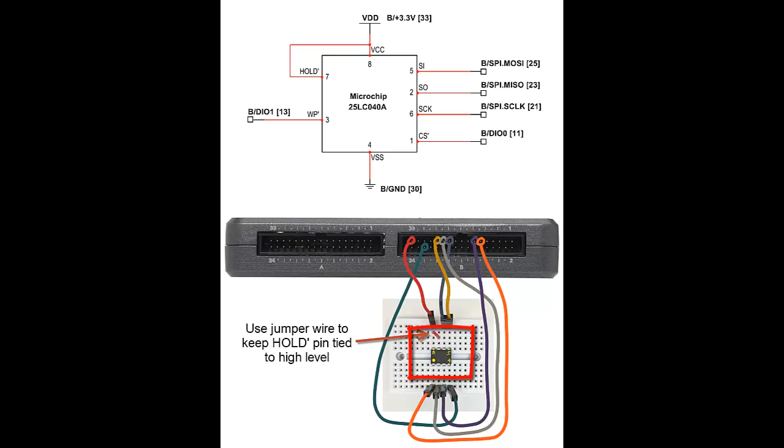Now let's take a look at the EEPROM demo LabVIEW project. Here I have the Microchip serial EEPROM connected up to MXP connector B. The VI is running right now.

You have a number of actions that you can perform. You can read the entire array, write to the array, read the status register, or write to the status register. Use this button to control the write protect pin.

Here you can read data from the array and display it in two different formats. Here you can specify values to write to the array and a starting address. Here you can specify a byte to write to the status register and then read it back.

Let's begin by reading the entire array. Now as shipped, that is when you have a brand new device, all the values will read as 255 or hexadecimal FF. Use the index control to look at different values within that array indicator. 511 is the last address. Set this back to 0.

Now at address 0, the value read back was 255. I'm going to attempt to write a 0 value to this location. So I want to write a 0 value at starting address 0. I'll select write array and then read back the entire array. Looks like no change here.

Well, it would help to enable the device for writing, so I'll click that one again, try writing and then reading back. All right, here's the 0 that was successfully written and then read back, and that's again visible on the plot.

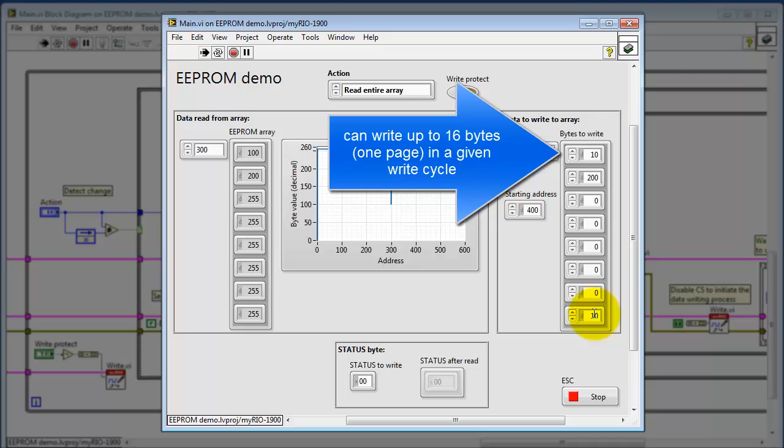Let's try writing a few more bytes all at once. Give this a different value here. I'm going to go ahead and select 30 down there, and that automatically fills in all the in-between values with zeros. I'll just leave it that way for now. Now you can write up to 16 bytes, which is 1 page in a given write cycle. So I do a read back after the write operation. Again, the vicinity of starting address 400.

Looks pretty good. Now at any time you can reinitialize the values to defaults, and that gets the front panel back to its original layout. Let's look at working with the status register. You can read back the status register after writing to it. So let me begin by reading the status register to see what's there.

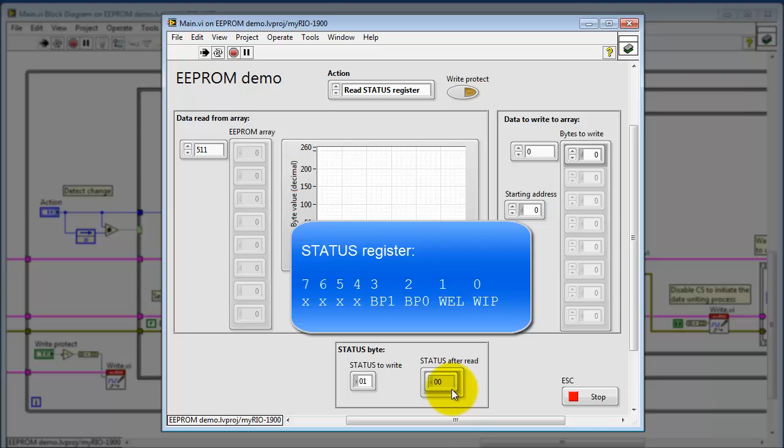Looks like 00. Let me attempt to write a different value, and I will attempt to set the read-only write in progress flag. Read back, and that didn't work. Well, I guess I had the write protect turned on. Let's try again. So I'll write the status register, then read it back. But this is a read-only bit, so you can't set it.

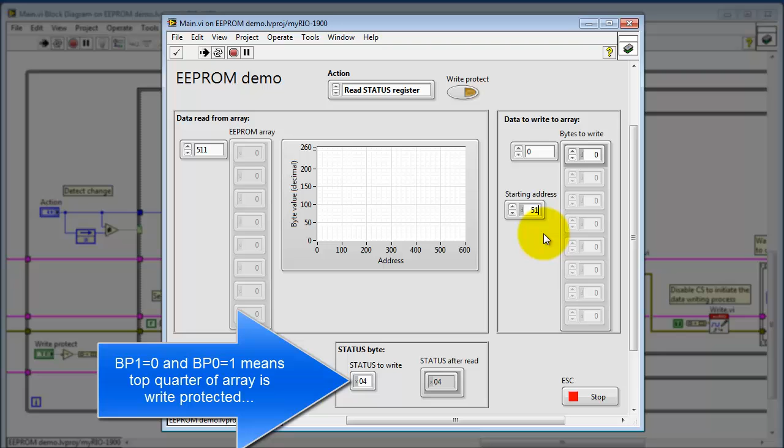Well, let me try selecting BP0, which is the block protect 0 flag, and this is a read-write bit. So I'll write it out, read it back, and sure enough, I was able to set that particular bit. Now I'm going to try writing to the very last address, address 511. The particular setting for the block protect bit means that the upper quarter of the array is presently write protected.

Let me read back the entire array just to confirm what's already there, which is 255. Let me attempt to write a 0 value at this location. Read back, and no, that didn't work. So that's evidence that the write protection is working.

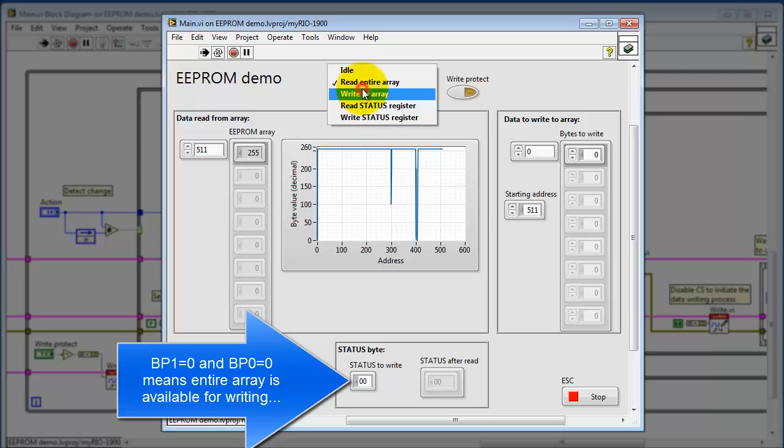Let me set the status register back to its original default value of 0. So write that and read it back. Let me try writing to the array and then reading back from the array. And here we have success. So at this point, I was able to write a 0 to that very last value.

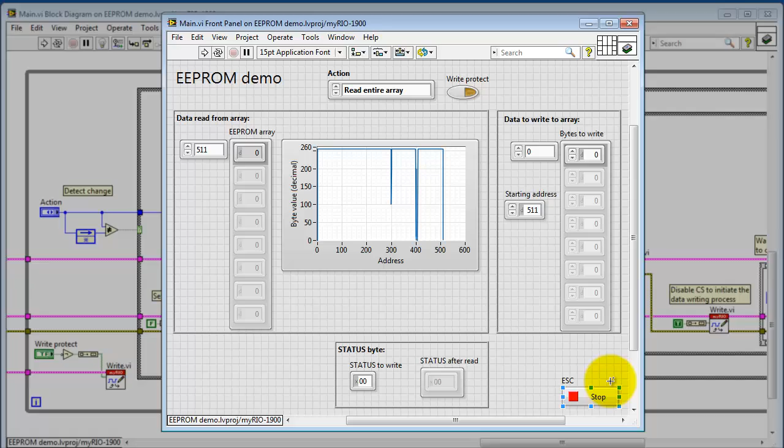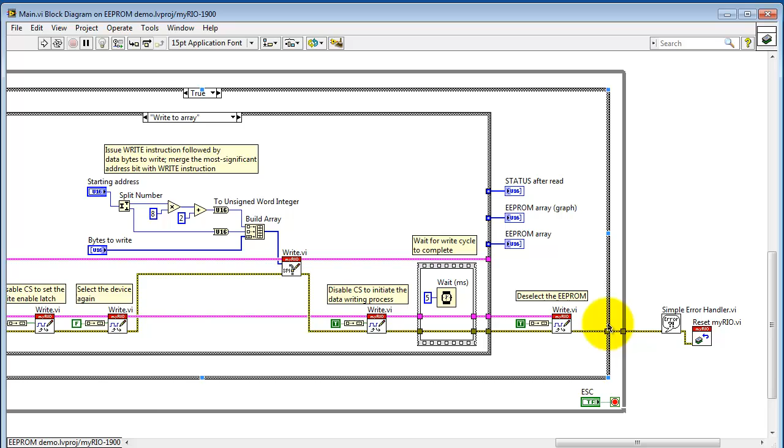Well, now let's take a look at the details of the block diagram. I have three sections: the configuration section, the main loop section in which I control the write protect line as well as process changes on the action control. When a change is detected, you have a number of different options depending on the action that was selected. That's the case structure. Here you see the front panel indicators. And finally, when you break out of the main loop, you can do a myRIO reset.

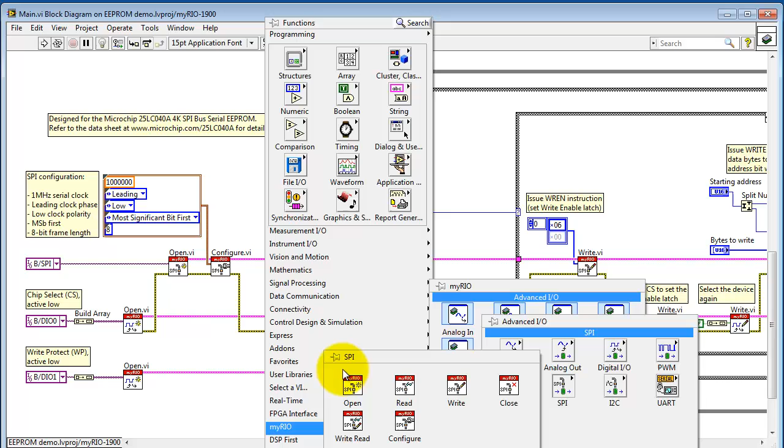Now, along this track, these are the SPI related VIs. These are available under myRIO Advanced IO and then SPI. You begin by opening the appropriate channel either on MXP A or B, and then configuring the channel according to all of these values here in the cluster constant.

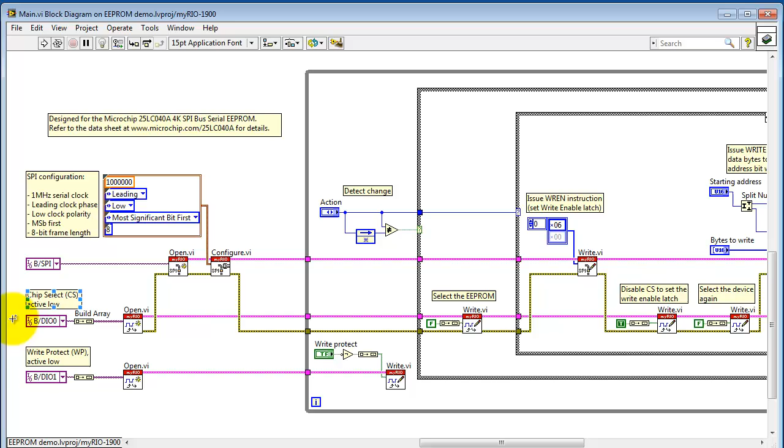I'm also using some low-level VIs to handle the digital outputs for both chip select and the write protect signal. These are also available under the myRIO Advanced IO subpalette under Digital IO.

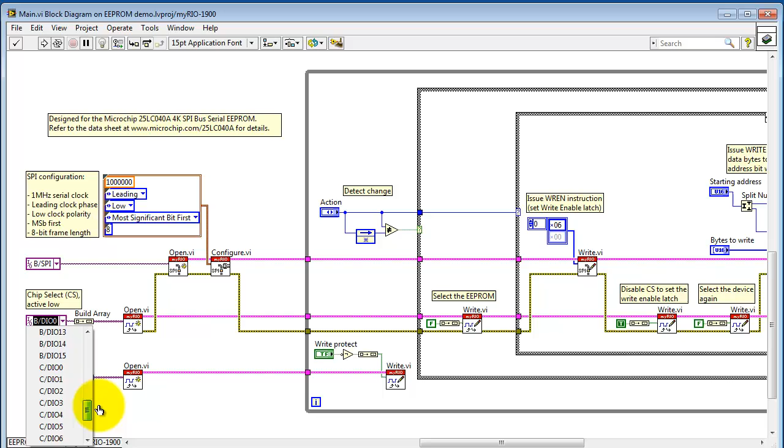Now the chip select, I'm generating on DIO 0 on the B connector, and I'm using DIO 1 for the write protect signal.

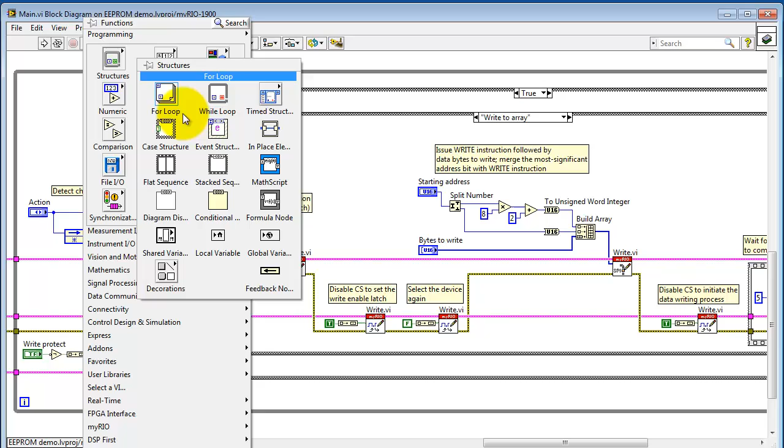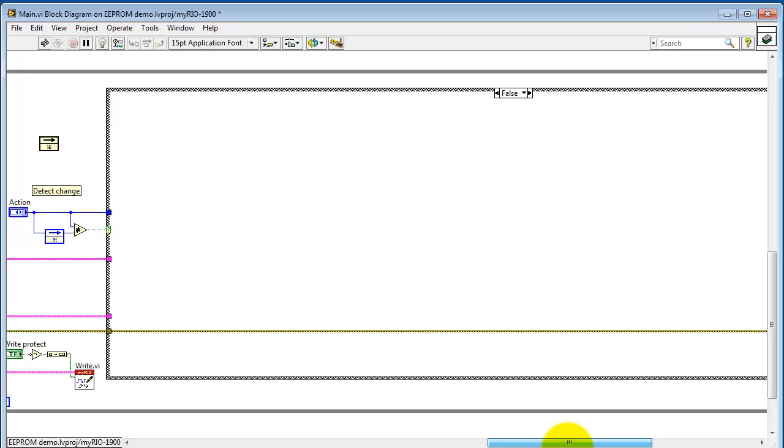Now inside the main body of the loop, I'm looking for a change in the action control. To do this, I'm using the feedback node located under the programming palette. You can change the direction like this. The feedback node remembers the value of action on the previous loop pass, and when that's different, you generate a true value right here. So on the outer case structure, when that's true, you can perform an action. If it's false, simply pass the error cluster through with no activity.

Now inside that outer case structure, I have the inner case structure, and this performs the desired sequence. All sequences begin by selecting the chip select of the EEPROM, and all of them end by deselecting the EEPROM. Again, that's manipulating the chip select. Now the action control value is fed to this inner case structure, and you have a case for each one of the actions, such as reading the array, writing to the array, and so on.

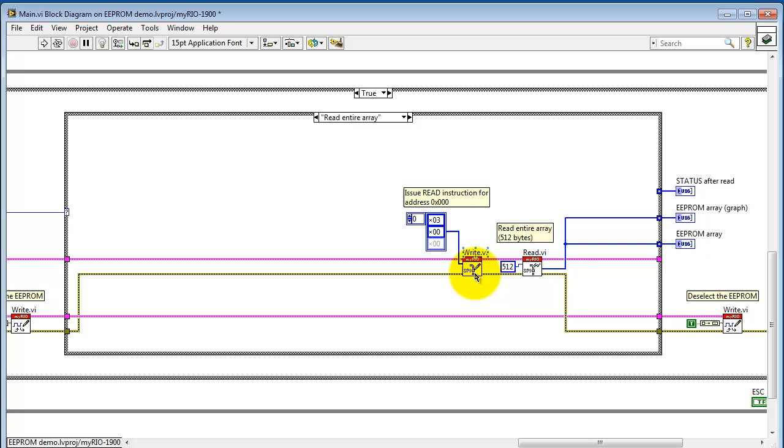Let's take a look at one of the more basic ones. Idle, of course, would be the simplest. It's just a straight pass-through. Reading the entire array works this way. You issue the read command for address 0. That looks like this pair of bytes that are written out to the SPI bus. You then request a read of 512 bytes. This is made available on these two indicators, one of which is the array indicator and the other is the graph.

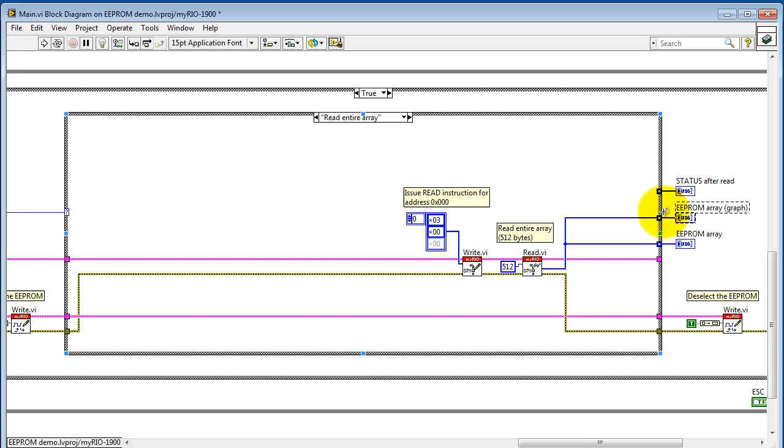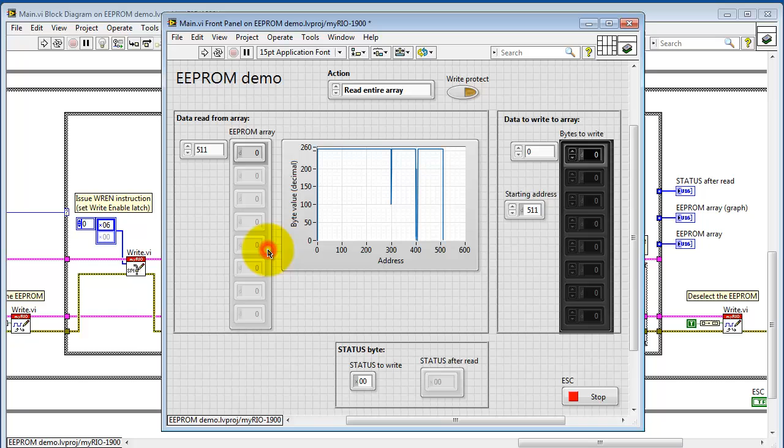So let's look at this tunnel for a moment. Looking at another subdiagram such as write to array, I'm not feeding anything out, so therefore I used right click and use default if unwired. Now the first thing we need to do under writing to array is issue the write enable instruction and then toggle the chip select. The write instruction is formed this way. It's based on the starting address and the number of bytes to write. That is the actual byte values in that array.

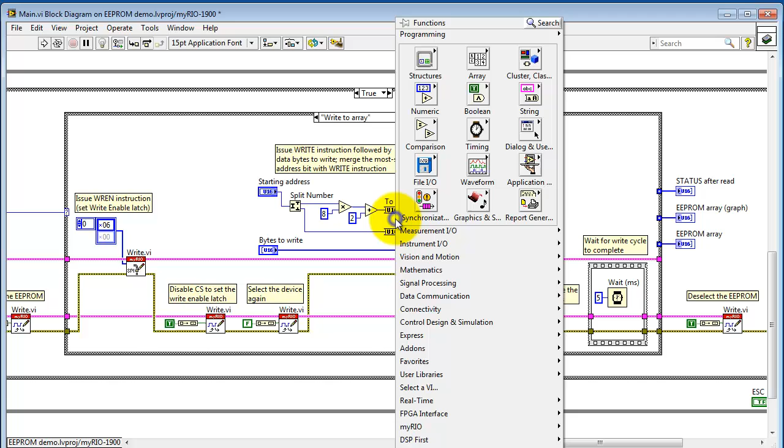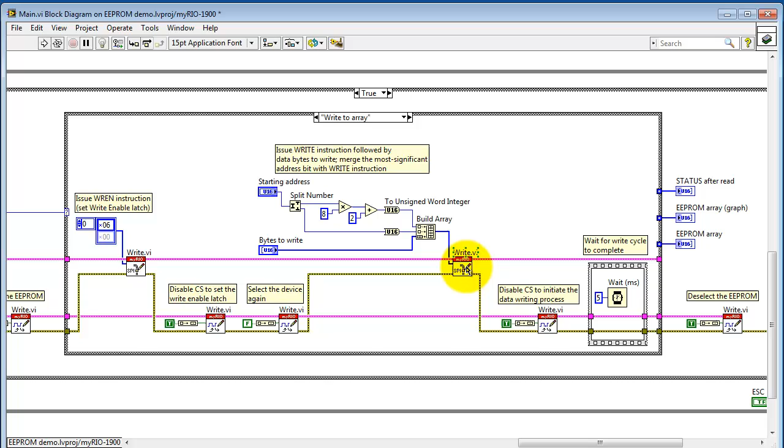So I look at splitting the starting address into two pieces. Here, look under the data manipulation subpalette of the numeric subpalette. That's split number. That breaks up the 16-bit address into 2 bytes. Both high and low are available. Here I'm shifting that most significant address bit up several places, inserting the instruction for write operation, casting that into a 16-bit unsigned integer, and then using build array with the concatenate inputs option turned on to assemble the complete instruction. So we have 2 bytes worth of instruction followed by the number of data bytes to write.

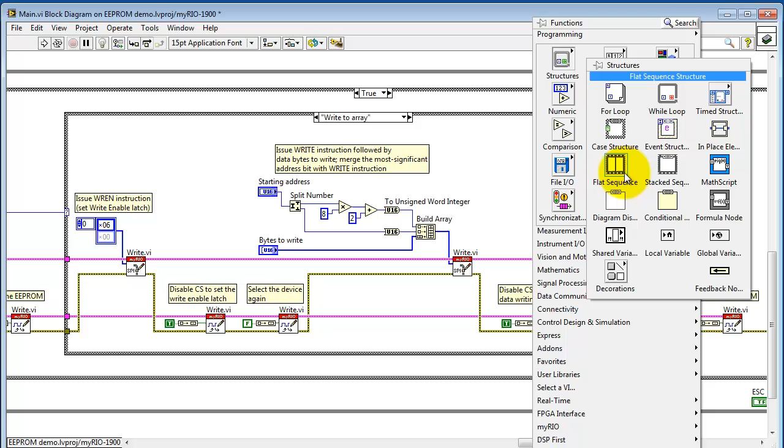Disable the chip select to initiate the data writing process, and then wait for 5 milliseconds. So I have 5 millisecond wait encased inside a single panel of a flat sequence structure. That's available right here. And that allows me to get the error cluster to pass through that structure and ensure that the wait happens at the right time.

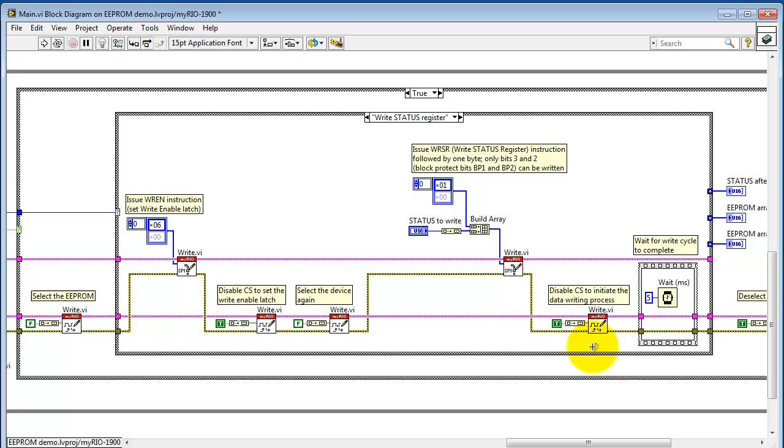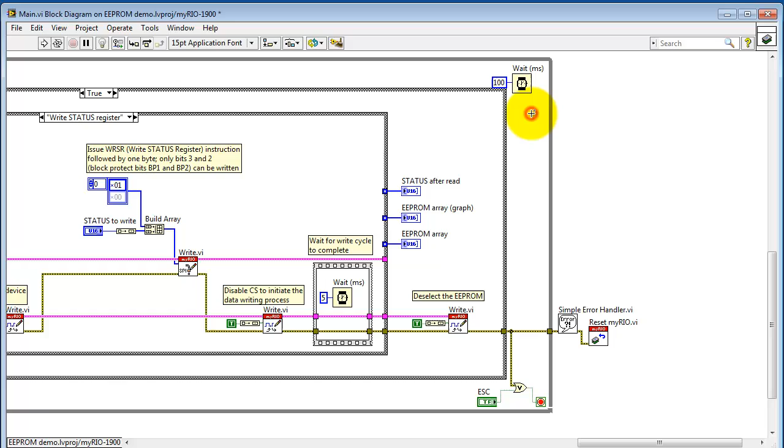Speaking of the error cluster, let's follow its propagation path through the entire block diagram. Again, the error cluster causes events to happen in a specific order. Eventually it emerges out the other side. We pass through this simple error handler and execute a myRIO reset. Now I'm just noticing that my usual construct here is missing, so let me stick that in here. This way an error or pressing the stop button will break out of the loop. Also, I'm pacing the loop at 100 milliseconds. That means the front panel action control is being polled at 10 Hertz.

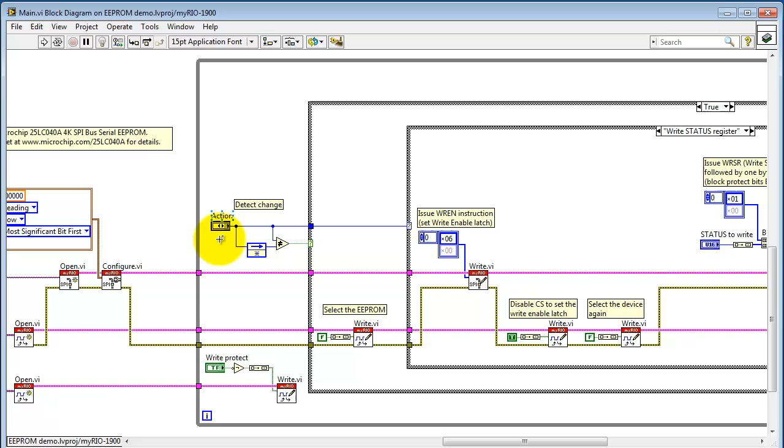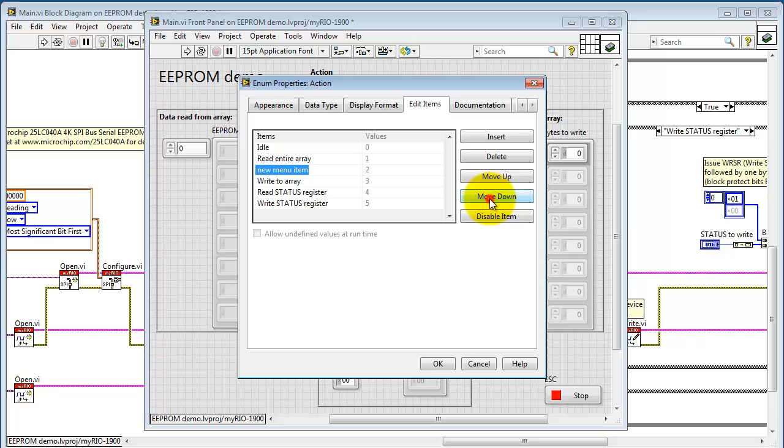Now I'm going to finish up by showing you how you can add additional functionality to this case structure. Each of the subdiagrams is based on the values from this enumerated data type called action. I'll show you where you can find this type of a control. Right-click, I'm looking under Silver, Ring and Enumerated, and the enumerated control is located right here. I'm going to right-click on that and choose Edit Items. Here we see that each item has an associated integer value. Now you can insert or delete or move things around as needed. I'm going to insert a new item here called New Menu Item. Presently it's associated with value 2, but if I move it down to the bottom, now it's associated with value 5.

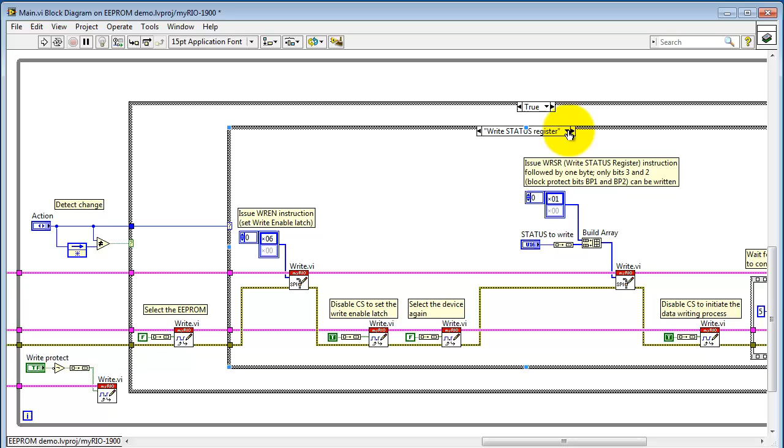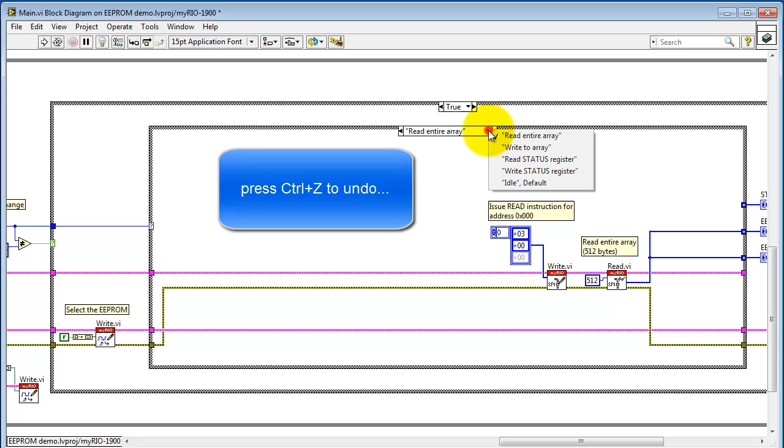Now I'd like to show you why it's advantageous to first begin by editing that enumerated control. Here we don't see any change, of course, in the case structure, but if I right-click and say Duplicate Case, especially if I find a case that's closest to what I would like to work on next, for example, supposing I wanted to use read array or read entire array as my basis for this. Now when I say Duplicate Case, you see that it's been duplicated and associated with that new menu item automatically. It's very convenient. I'm going to do a quick Control-Z to undo my previous step and show you another method.

Here I'm selecting a sub-diagram. I'm going to say Add Case After. Now it's created an empty sub-diagram with that new menu item name.